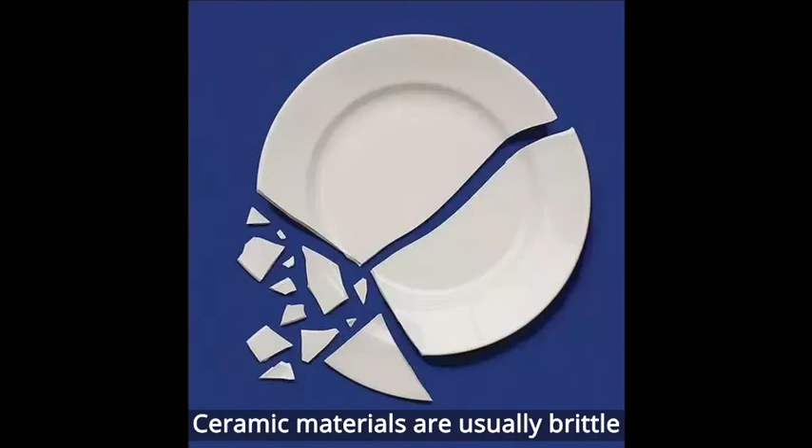This is because ceramic materials have their own shortcomings; ceramic materials are usually brittle, they are not tough enough. The two ceramic antiques we just mentioned are one kind of traditional ceramics. It's a little bit difficult to explain what ceramics is, but it is easy to understand.

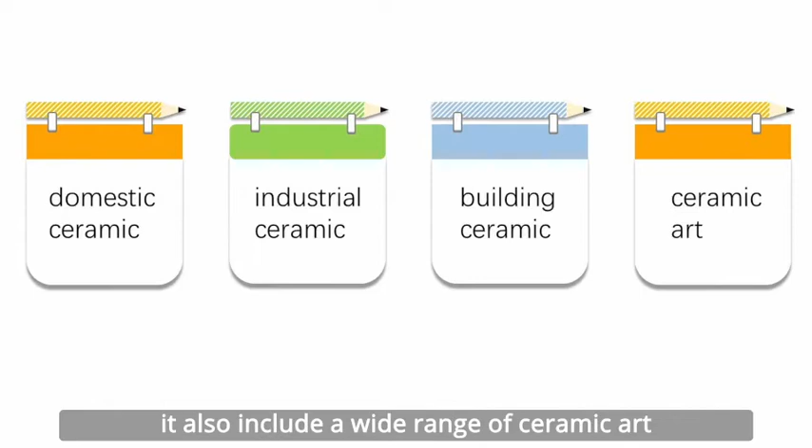What kind of material is ceramic material? Ceramics now include domestic, industrial, and building products. It also includes a wide range of ceramic art. There are many different ways to classify ceramics. One way is to define ceramics by their applications. Most ceramic materials include the following groups: glasses, structural clay products, whitewares, refractories, abrasives, cements, and newly developed advanced ceramics.

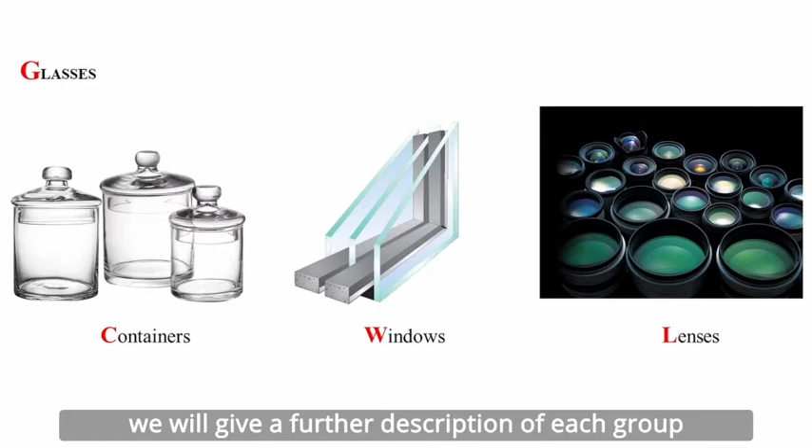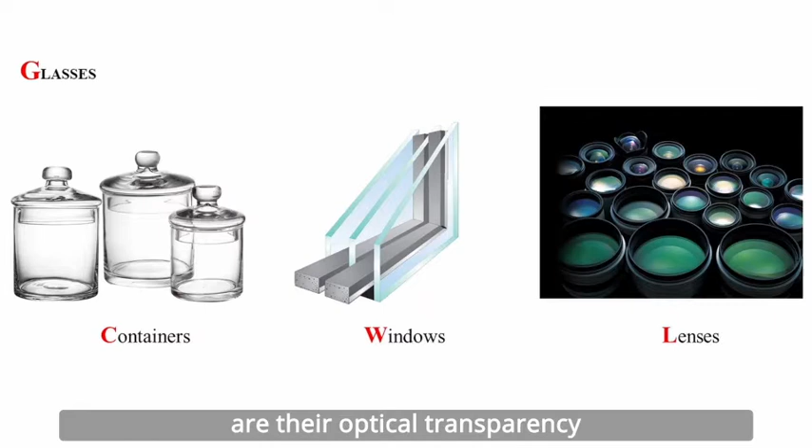Now we will give a further description of each group. The glasses are a familiar group of ceramics. We can see them every day, everywhere. The major advantage of glass materials is their optical transparency. Their typical applications are containers, windows, lenses, and fiberglass.

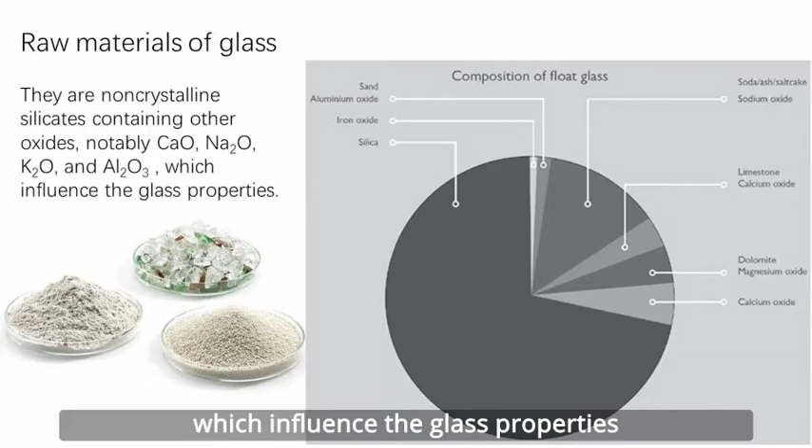Most glassy materials are noncrystalline silicates containing other oxides, which influence the glass properties. The other advantage of glass is that it is very easy to fabricate into various shapes.

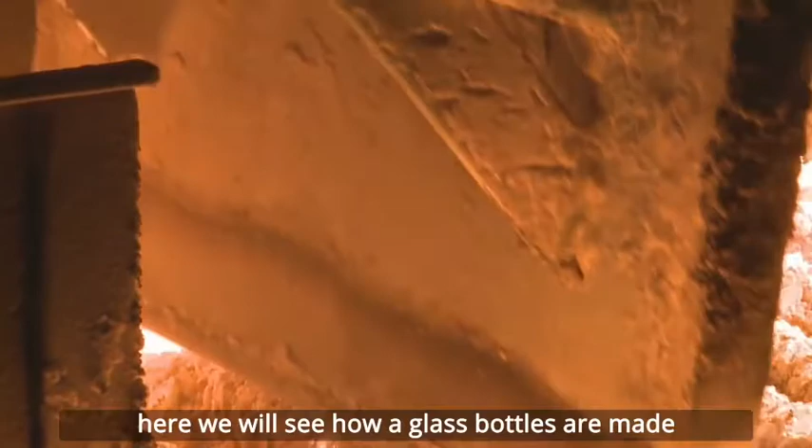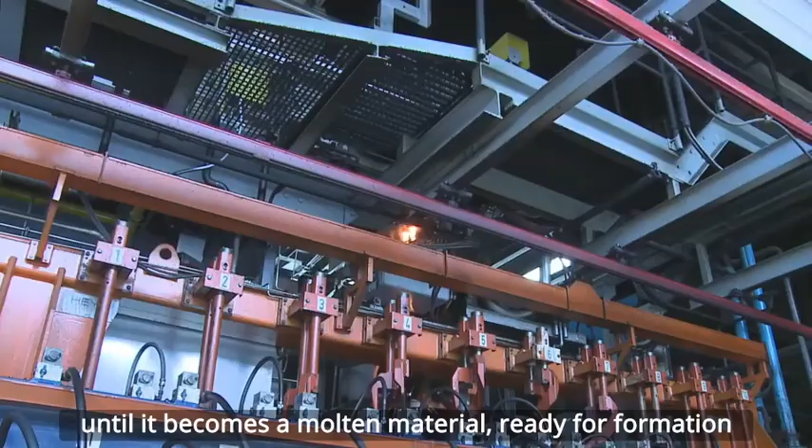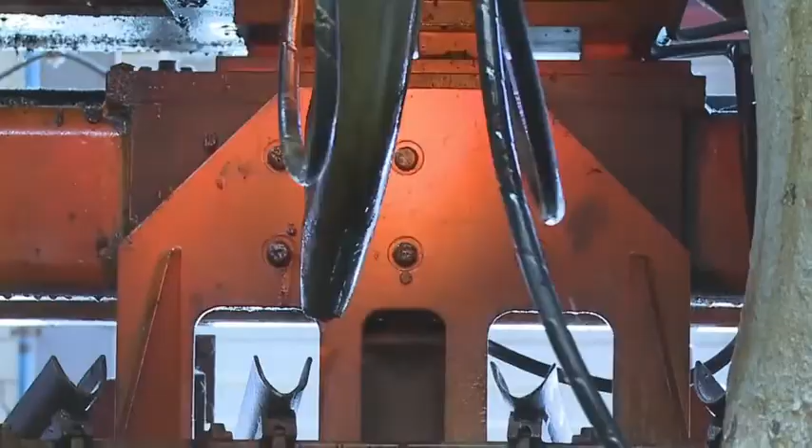Here we will see how a glass bottle is made. Firstly, the factory equipment feeds precise amounts of raw material into a furnace. The mixture is then melted at a high temperature in the furnace until it becomes a molten material ready for formation. Molten glass gobs are cut by a perfectly timed blade to ensure each gob is of equal weight before it goes into the forming machine.

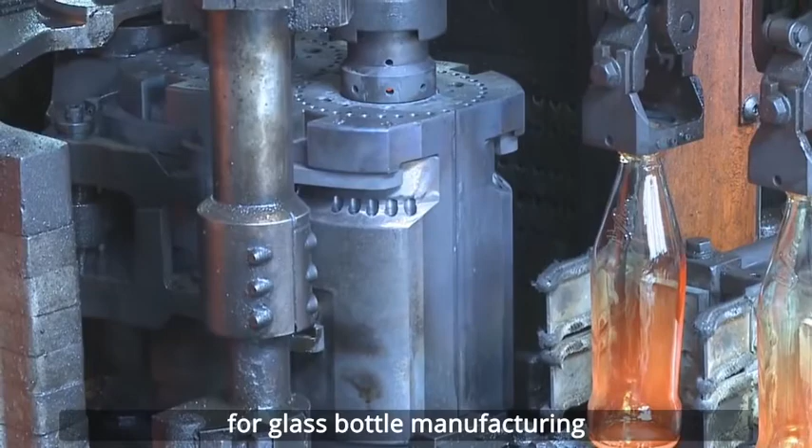When molten glass gobs feed into the mold, the blow and blow method is best used for glass bottle manufacturing. As you can see from this example, with skillful blowing and turning, all kinds of amazing shapes can be made by molten glass. Glass ceramics.

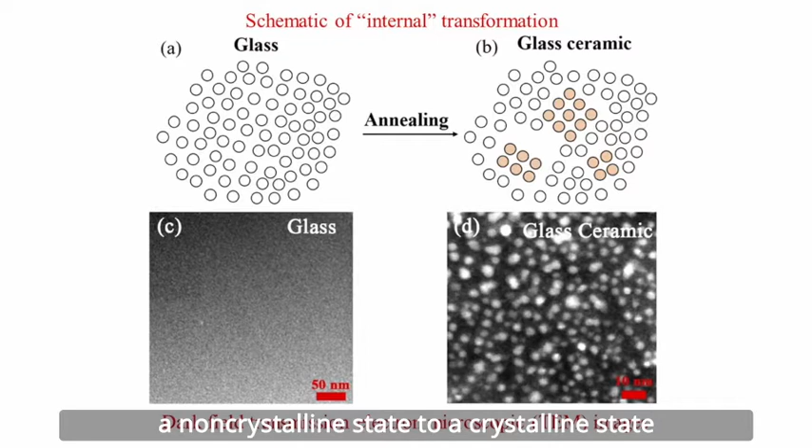Most glass can be transformed from a non-crystalline state to a crystalline state by purposeful high-temperature heat treatment, and the product is a fine-grained polycrystalline material, often called glass ceramics.

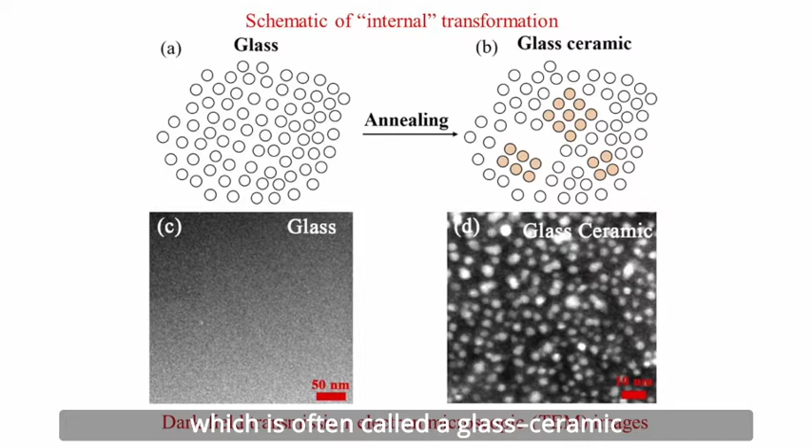The glass ceramics will have a low coefficient of thermal expansion. The most common uses for these materials are as ovenware and tableware, primarily because of their high strength, excellent resistance to thermal shock, and their high thermal conductivity compared to normal glass material.

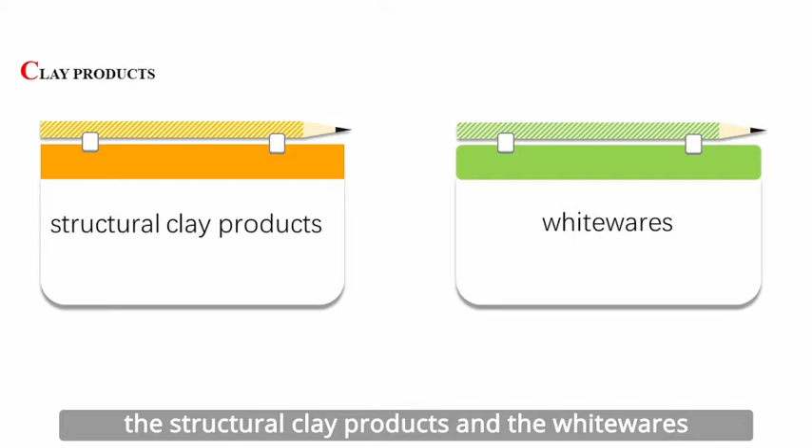Clay products: most clay-based products have two broad classifications, structural clay products and whitewares. Structural clay products include building bricks, tiles, and sewer pipes. Whiteware ceramics become white after high temperature firing. This group includes porcelain, pottery, tableware, china, and sanitary ware.

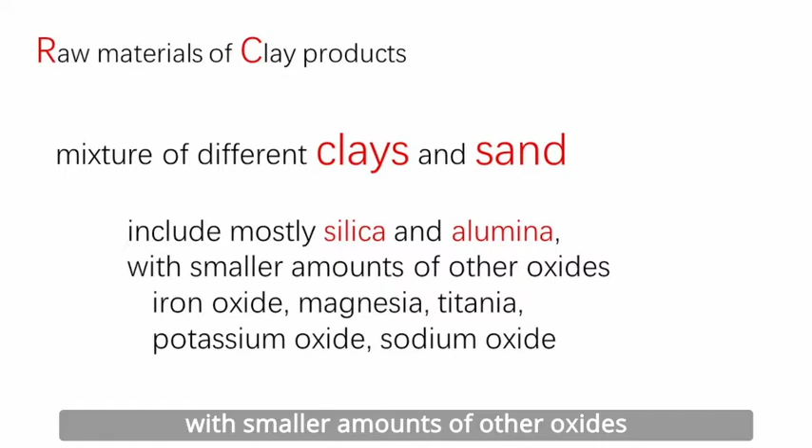Whiteware products and structural clay products use similar raw materials. Both are made from a mixture of different clays and sand. They consist of various combinations, including mostly silica and alumina, with smaller amounts of other oxides, such as iron oxide, and so on.

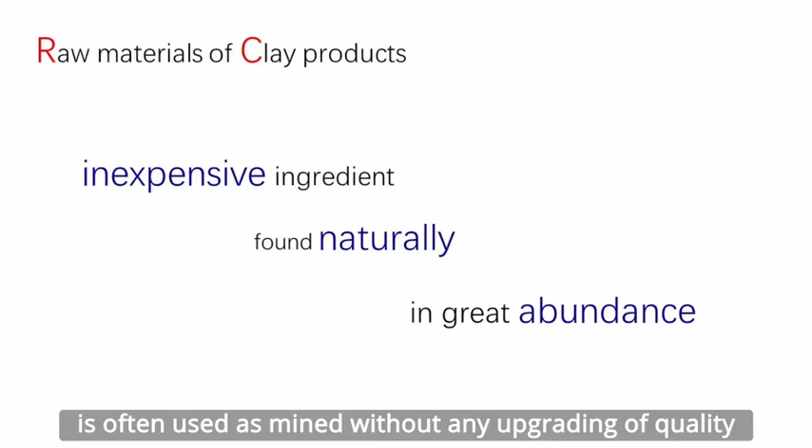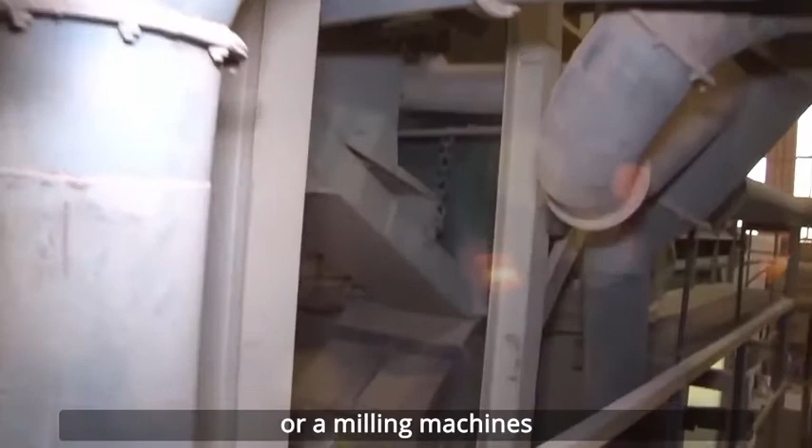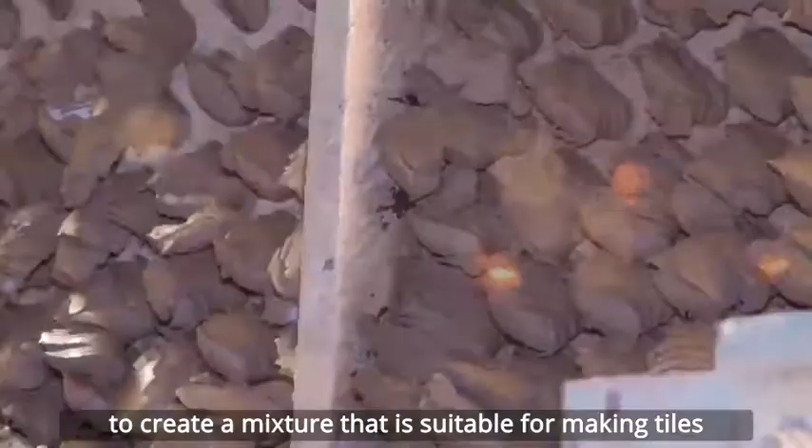This inexpensive ingredient, found naturally in great abundance, is often used as mined without any upgrading of qualities. Here is another demonstration showing how tiles are made. The raw materials are put into a crusher machine or a milling machine, which breaks up the larger pieces into very tiny particles. The particles are mixed with water and other additives to create a mixture that is suitable for making tiles.

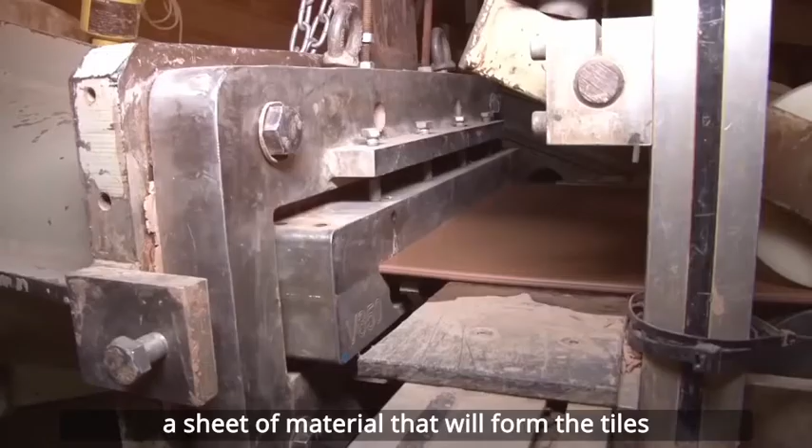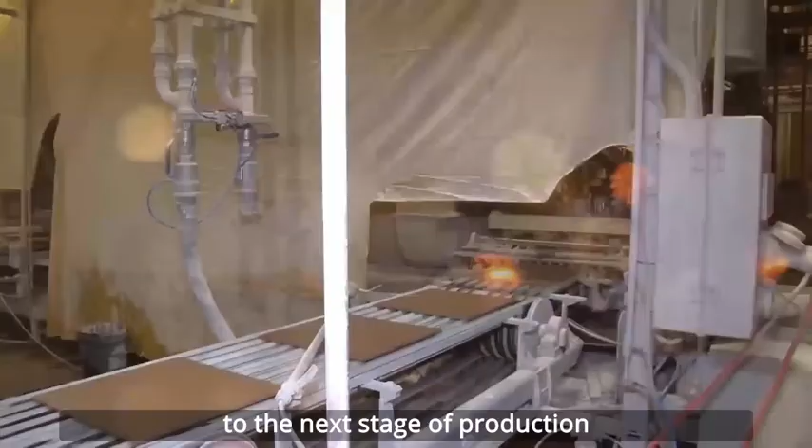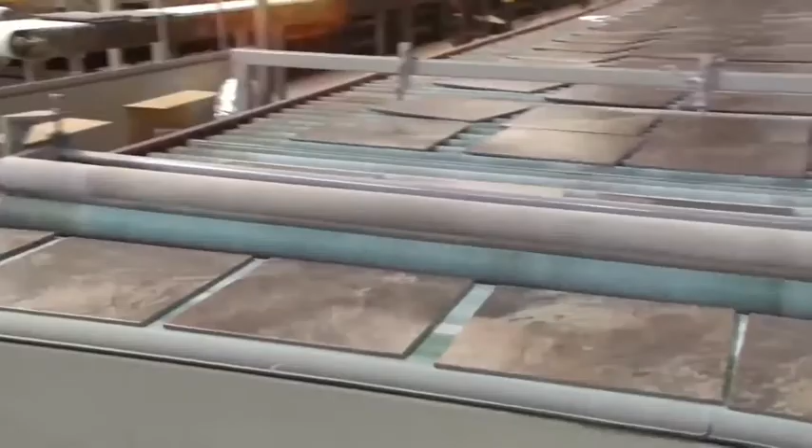The tiles pass through a drying process to remove some of the moisture from the material. Then the tile is printed on the surface, forming the pattern on the surface of the tile. Last step, the tile passes through the firing process in the kiln.

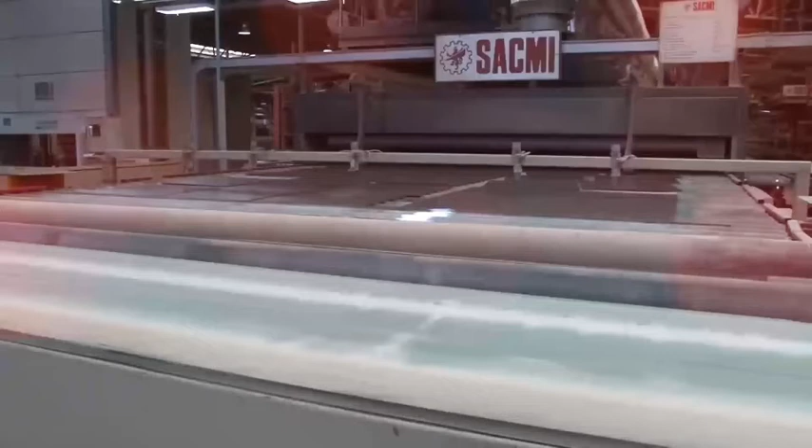The kiln is a long tunnel heated by gas heaters. In the first section, the tile is dried at a low temperature to remove water from the clay. Once dried sufficiently, the temperature in the kiln is raised to 1185 degrees centigrade, where the tile is fired. The detail of firing or sintering will be discussed later.

Another kind of ceramics material is the refractory material. We usually see less of it in daily life. Refractory materials must be chemically and physically stable at high temperature.

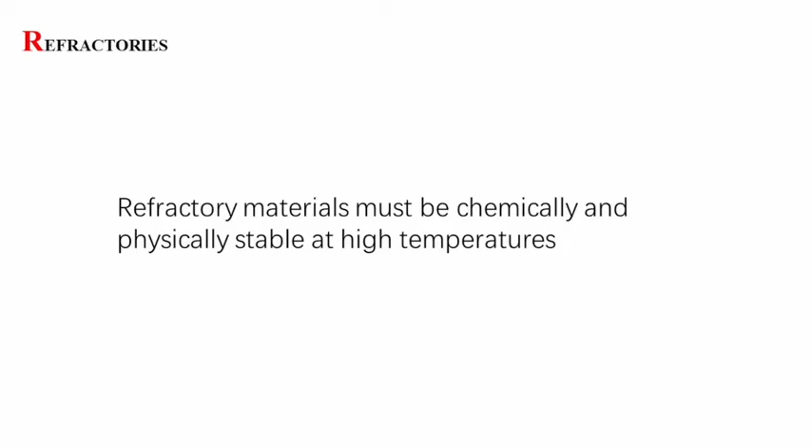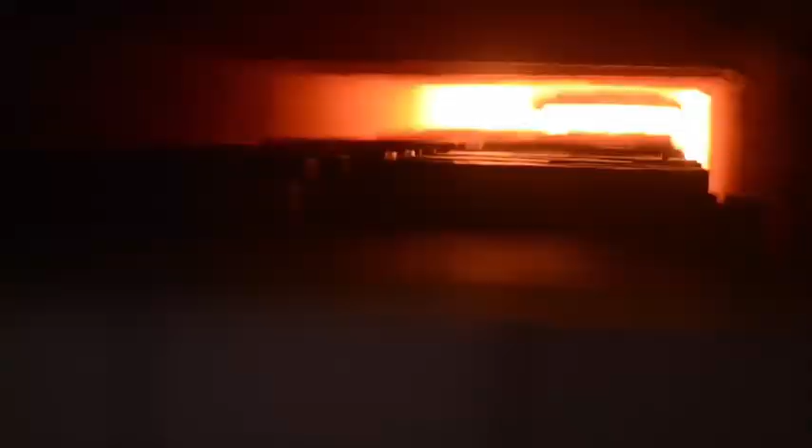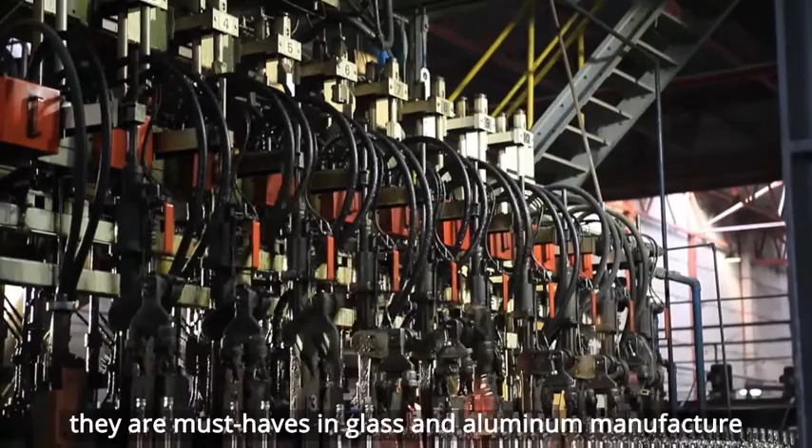Refractories are heat-resistant ceramic materials that can withstand mechanical abuse and chemical erosion at very high temperatures. More heat-resistant than metal, refractories are essential to the production of iron and steel. Able to withstand chemical corrosion, they are must-haves in glass and aluminum manufacture.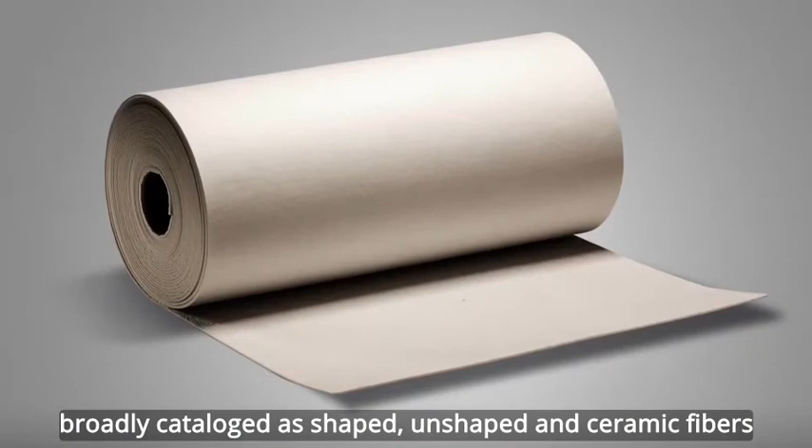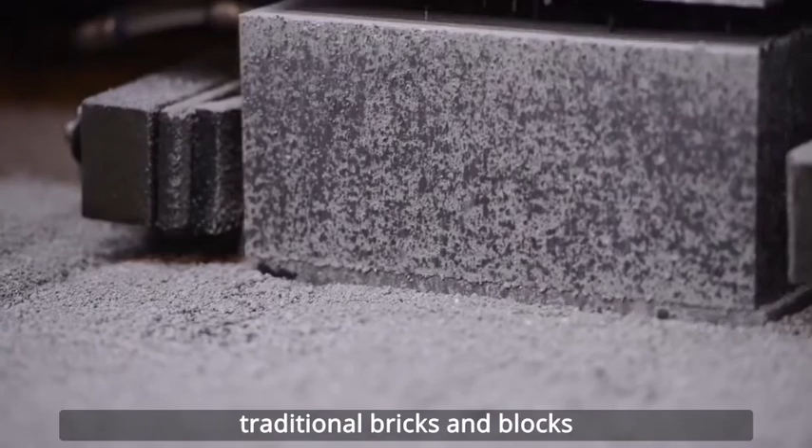The material assumes an impressive variety of forms, broadly cataloged as shaped, unshaped, and ceramic fibers. Shaped products may have simple geometries or complex interlocking ones. Traditional bricks and blocks are usually pressed into shape and then fired in large industrial kilns. Depending on their size, composition, and application, shaped products may also be precast, fused, or pressed at high temperatures.

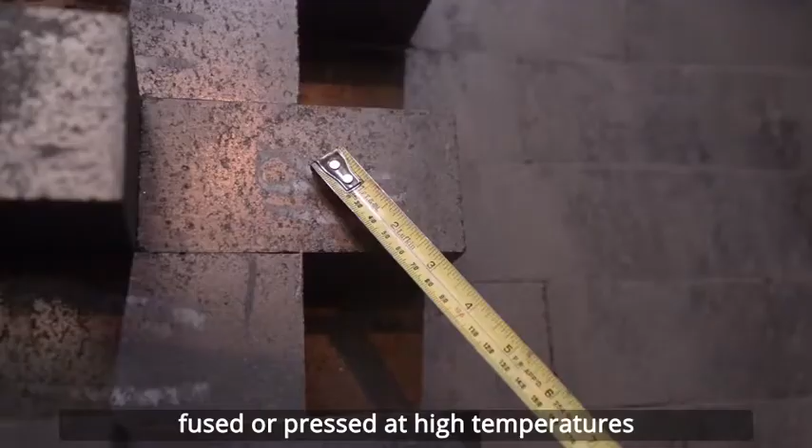This photo shows refractory linings for a furnace. It was built with many refractory bricks. The refractory ceramics are also chosen as crucibles and ceramic molds.

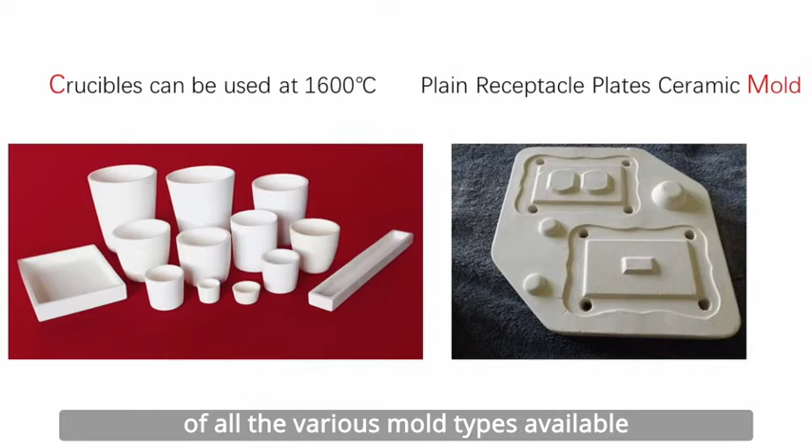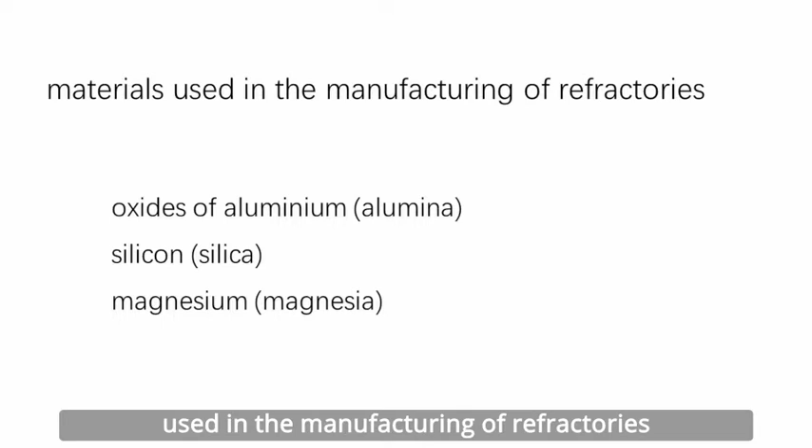A crucible is a ceramic or metal container in which metals or other substances may be melted or subjected to very high temperature. Ceramic molds are used in investment casting and have the most accuracy of all the various mold types available. The oxides of aluminum, silicon, and magnesium are the most important materials used in manufacturing refractories.

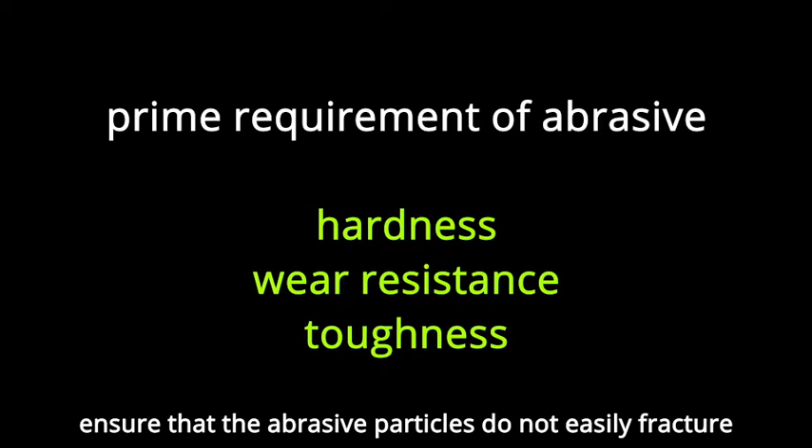The next kind of ceramics material is abrasive. Abrasive ceramics are used to wear, grind, or cut away other materials. Therefore, the prime requirement for this group of materials is hardness or wear resistance. In addition, a high degree of toughness is essential to ensure that abrasive particles don't easily fracture. Furthermore, high temperature may be produced from the abrasive friction force, so some refractoriness is also desirable.

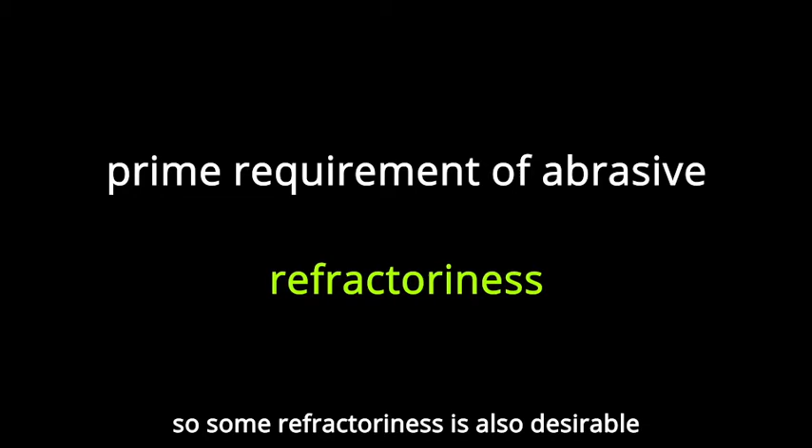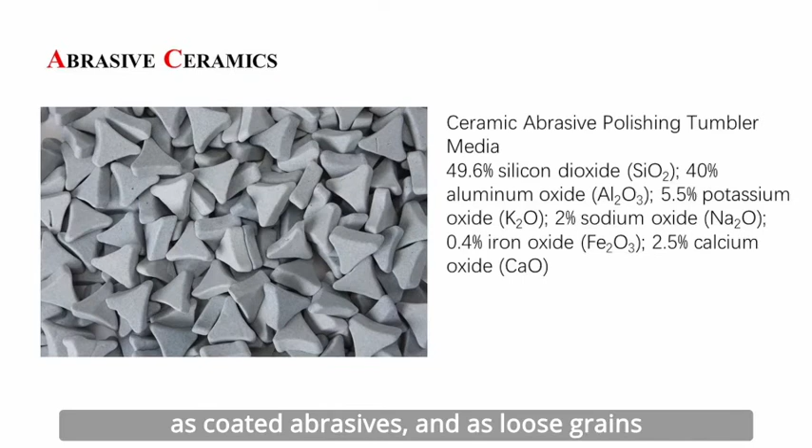The more common ceramic abrasives include silicon carbide, tungsten carbide, aluminum oxide, and silica sand. Abrasives are used in several forms: bonded to grinding wheels, as coated abrasives, and as loose grains. In grinding wheels, the abrasive particles are bonded to the wheel by means of glassy ceramic or an organic resin.

Usually, cements are classified as one kind of traditional ceramics because they have similar ingredients. But as a structural material, cement is quite different from ceramics, so we will not discuss cement here.

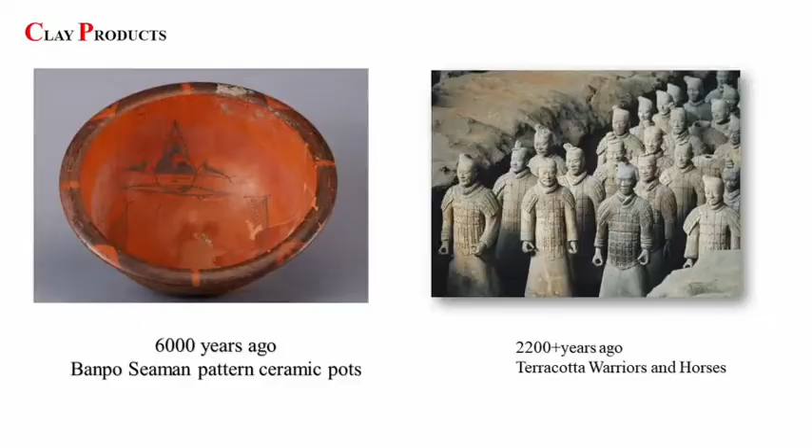Let's go back to the starting story of this video. You should know by now what kind of ceramic material they belong to. Yes, they are clay products. The ancients made them the same way that we make tiles or sanitary porcelain today.

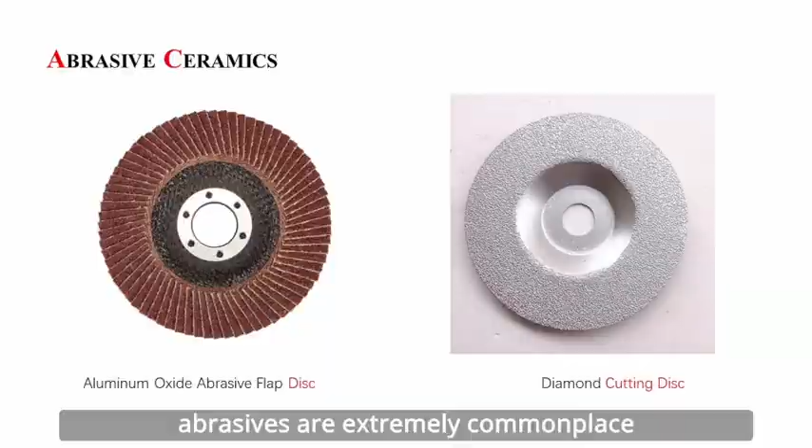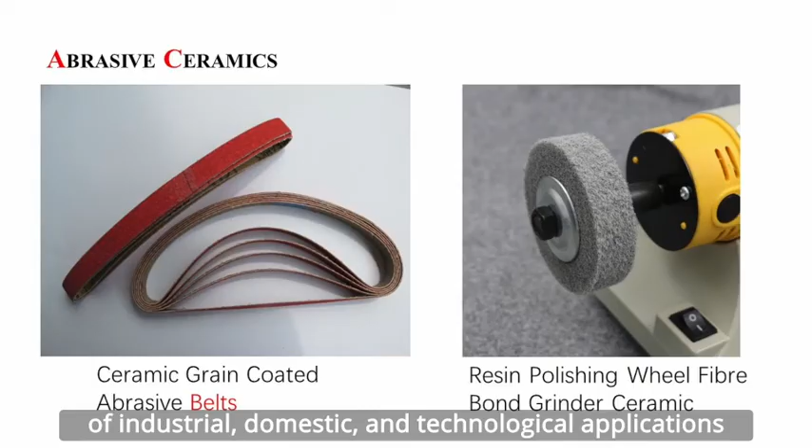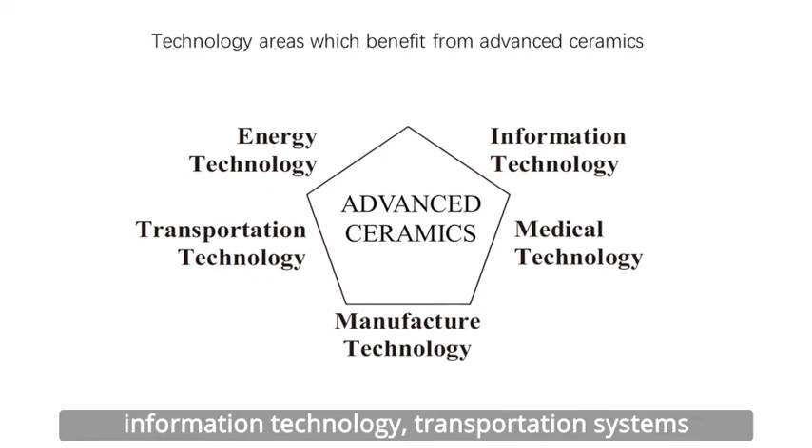However, advanced ceramic materials have now become the cornerstone of energy transformation, storage and supply, information technology, transportation systems, medical technology, and manufacturing technology. Unlike our ancient people, in the past decades significant progress has been made in understanding the fundamental character of these materials. We will explain advanced ceramics in the next separate video.

Ceramics are a big family. Some you are familiar with, some you heard for the first time. Now, do you have any ideas about each ceramic's application?